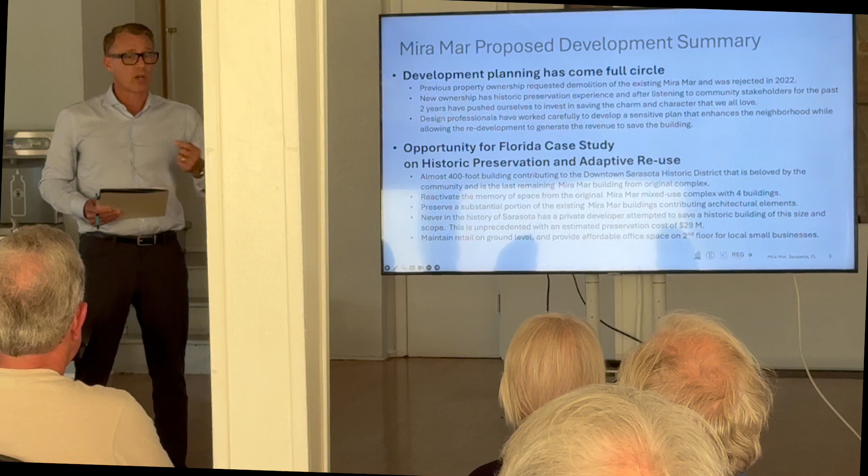We said to ourselves, is it possible to save a nearly 400-foot long wood frame structure that's 100 years old? Initially we thought not, and that's why we went forward with the demolition plan.

Could we afford to do so? In Connecticut, where I built homes and commercial properties before moving to Sarasota, I was involved in many single-family restoration projects. Any time we got involved with restoration compared to a new home, it would always cost us ten times as much—four times as long, ten times the money. That was my history coming down from Connecticut.

So we paused and took the time to really reflect and ask, once again, can we do better? Matt and I scoured the state and ran into Mr. Rick, and immediately we received an education.

So we rekindled that relationship, and basically Rick said to us, if I'm going to be involved in this project and put my pedigree and my name on it, it has to be done the right way. So I'm driving the bus, we're going to drive the decisions—and Matt and I listened.

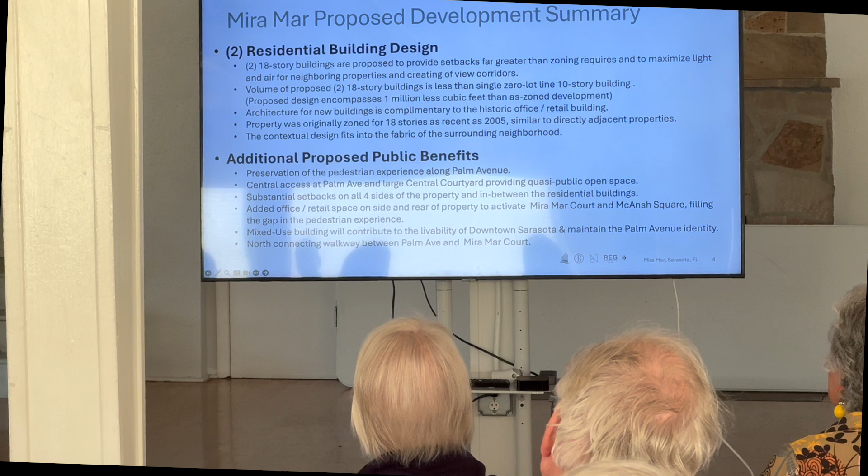Nowadays, the big buzzwords in mixed-use development are activated, connected, and vibrant. That's really what went into the vision behind this process — to create something for the community that's valuable. It'll be a nod back to history, but also vibrant and livable for the future. I'm going to turn it back over to Melissa.

These are just some of the preliminary matters we already discussed. Let's go to the next slide.

This is the exact request by the applicant. The first is a comprehensive plan amendment, changing the future land use classification from its current downtown core to downtown Bay. The second is to rezone the property, also from downtown core to downtown Bay, to allow for 70 residential units.

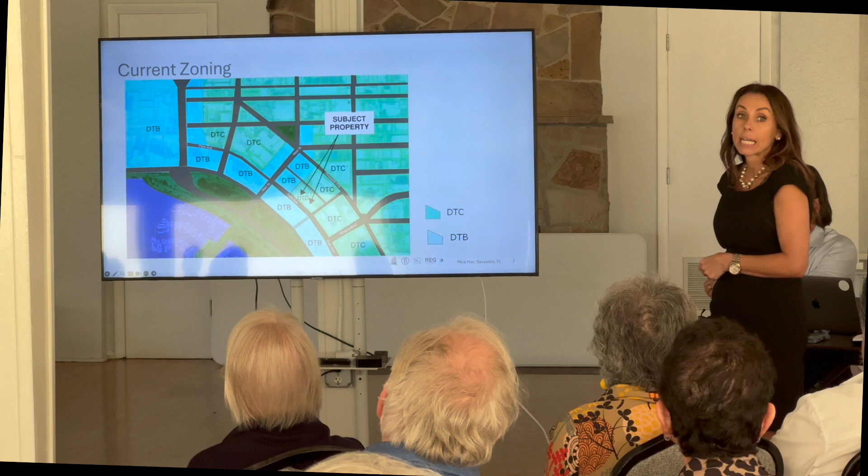But remember, it's just to develop these 70 residential units. I want to make it clear that this rezoning is not adding any density on this property — the property as currently zoned already allows for the 70 residential units. The purpose of the rezoning is for the 18 stories, as I'll show in this presentation, and as Igor and Rick will discuss in depth when they go through the project design.

This is the current zoning. You see the Mira Mar property here, zoned downtown core, changing to downtown Bay. As Candace pointed out, prior to 2005 this property was zoned CCBD, Commercial Central Business District, which allowed for the maximum height in the area. We are just going back to what it was pre-2005.

This gives you a glimpse of the permitted uses in downtown core compared to downtown Bay. They are identical except that five more noxious uses are not allowed in the downtown Bay district. So you will not have a detention facility, vehicle repair, or quick servicing repair nearby — things that could come up right next door right now.

Downtown Bayfront, my apologies — so we're rezoning from downtown core to downtown Bayfront. Sometimes I let my wording and slang get too far ahead of me.

These are the development standards. Again, identical — they allow for the same density, same lot size, same building coverage. The only thing changing is the height, to 18 stories. That may seem like a big deal right now, but I'm comfortable that once I turn this over to Rick to discuss the project design, it might alleviate some of those fears. So with that, I'll turn it over to Rick Gonzalez.

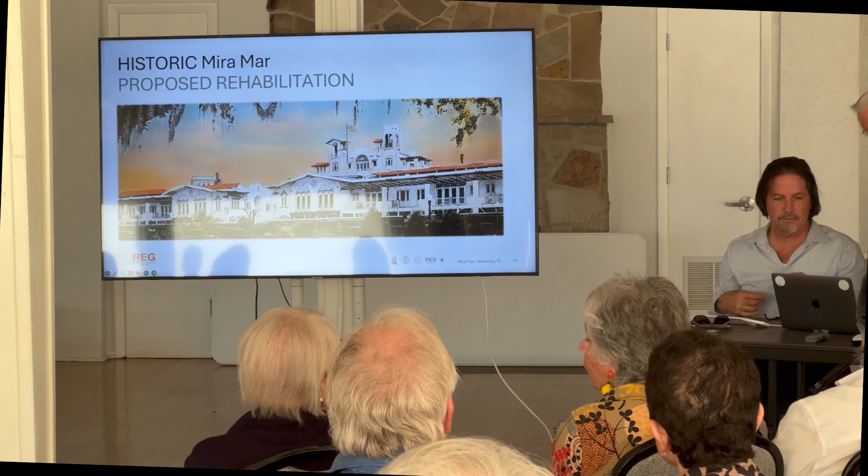Good evening, everyone. Can you hear me? Hopefully, yes. Okay, warm evening — I think they said fall is going to be here Sunday, right? So we hope so, right?

So I would like to talk today about the historic portion of the project. My friend Igor is going to be talking about the towers. The towers are what is going to help pay for the $29 million it's going to take to restore this project. If you can't get the towers built, there's no economic engine to save the structures.

The structures are in very, very bad shape. The building officials have already walked through portions of the building. Portions of the buildings are not accessible. We've had a lot of rain, we've had a lot of storms.

I'm on the East Coast. I keep praying every day. So far, knock on wood, right — no hurricanes in Florida this year, right? And that's through the end of the year, right?

But the Mira Mar is under threat — it really is under threat. It's a spectacular building, 400 linear feet of building. I remember when Matthew called me a couple of years ago and said, 'Hey, I got a historic project for you in Sarasota.' I said, oh, I like Sarasota — I remember when Andres Duany came over here and did some plans for the city. Love to see the project.

He sent me some beautiful renderings that Igor had done, but it was of a brand new building. There was no historic Mira Mar. He said something like, can you give it a little touch to make it look more like the Mira Mar? And I said, no, I can't.

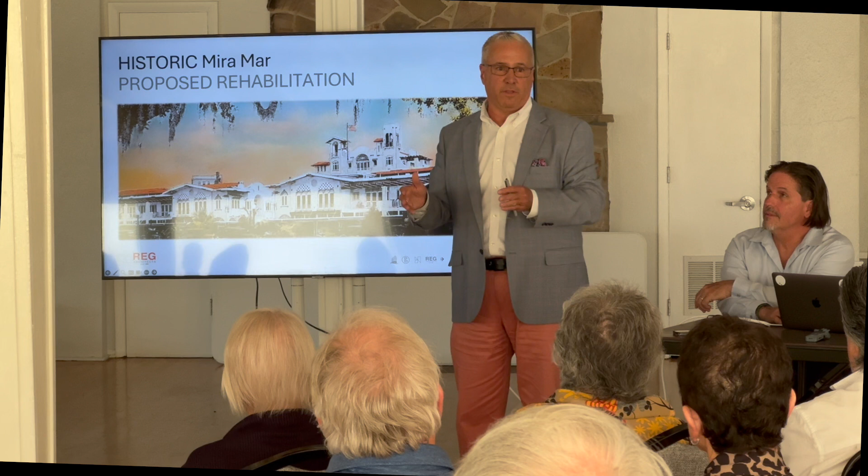I thought it was really important that we spend a little time with the community to show you these magnificent structures, 400 linear feet. I live and work on Clematis Street in West Palm Beach—our blocks are 600 feet long, and our buildings are anywhere from 50 to 150 feet. So 400 feet is a really long historic building.

Next slide, please. As you can see, it's already eclipsed 100 years in 2023. It was built very rapidly to support the hotel—I think you said it was 2 months of construction for the original? I thought the Breakers was quick when they took 11 months to rebuild it in Palm Beach, but 2 months to build the front buildings so that in 1923-24 they could build the hotel, the Grand Lady, behind the structure.

Originally apartments above and retail below, but in the last 40 years or so, since the 1980s, it's been office use with commercial on the first floor. This is probably the most affordable second floor office space in downtown Sarasota—everything has gotten so expensive with the amount of people coming to Florida, and our main streets are disappearing. So there it is in its grand heyday.

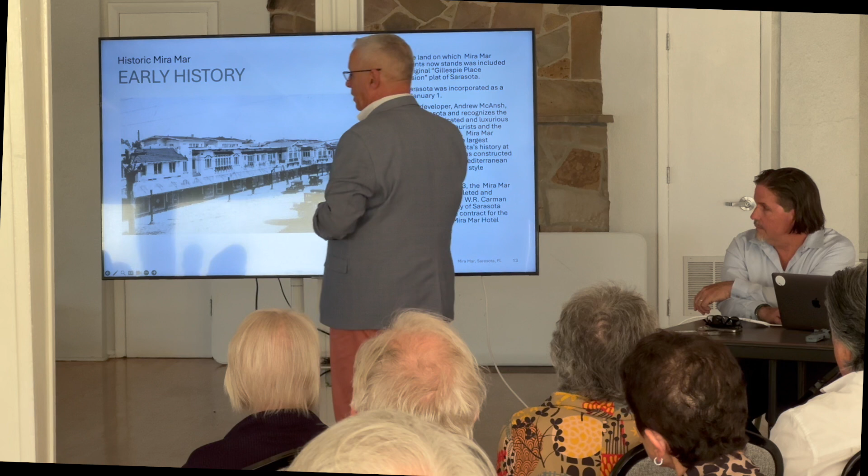If you look at the Sanborn maps, the historic maps, they show you development patterns over time. There wasn't anything across the street or behind—just the shops in front, the courtyard, additional side yards, the hotel, and a beautiful theater where the Aloft Hotel is today, which is gone now.

These are just some really beautiful pictures of what the building used to look like. Really, really gorgeous, very eclectic too. Some people would say it's Mediterranean revival. I say yes, but it's got some mission and even maybe some early Frank Lloyd Wright with the beams and the overhangs. There's phenomenal large overhangs on the building. I haven't seen that in any other Mediterranean building. Usually they go from 12 inches to maybe 30 inches, but these are almost 4 or 5 feet. A lot of detailing, a lot of interest.

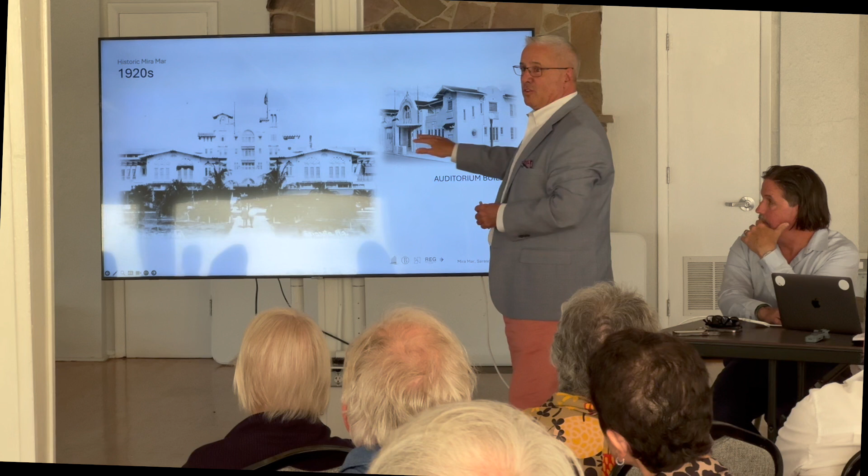The theater was spectacular. Too bad we couldn't convince the A-Loft to have kept the theater, right Tony, on the side of it. But there it is.

The courtyard space is just phenomenal. We're going to embrace the courtyard, reconstruct it, and it's going to be one of the 2 entries into the beautiful apartments designed by Igor. We're going to have another via too, adjacent to the demarque. There's a 6-foot alley, a via, a pedestrian via. So there'll be 2 ways to cut across the street, from the east side to the west side. And there's also a big change in topography there, by the way. We're going to have, I think it's about 8 feet, right Igor?

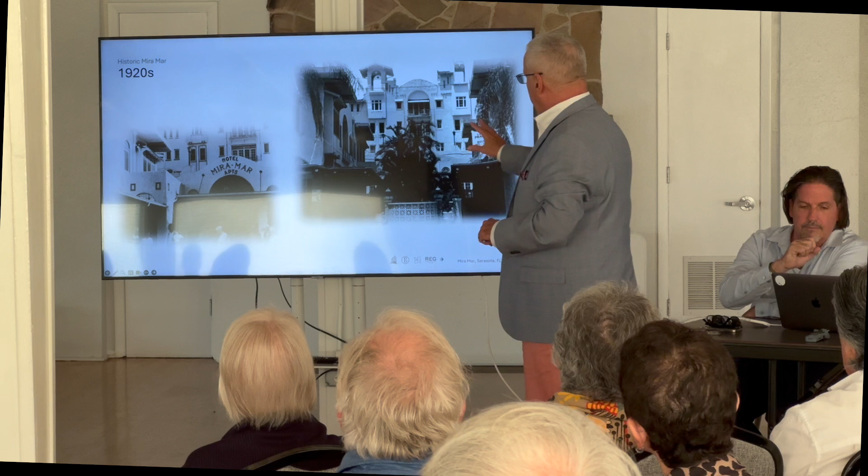From the back street down to Palm Avenue in the front. And so the towers, go back for a second, there you go. So the towers will be like that, coming in with the courtyard space up in the middle. Again, the idea of bringing in the courtyards, you'll see Igor's presentation showing those areas, some of that feeling, that idea of history coming in place, all the way through the 70s.

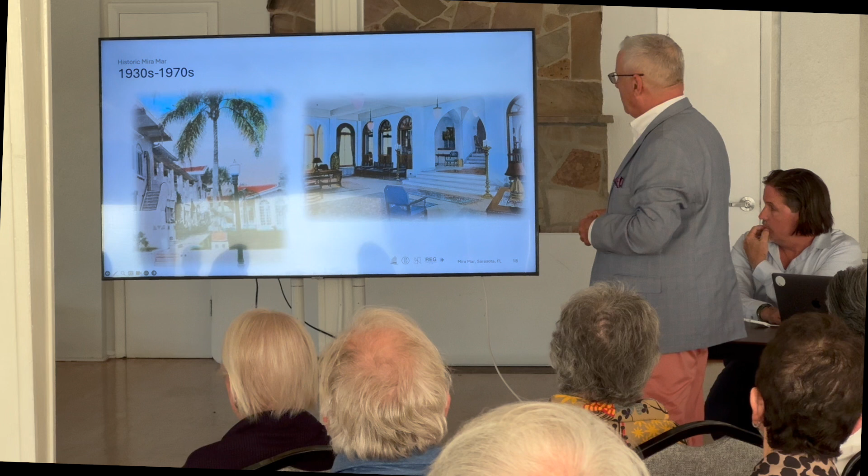That was really the period of significance for this structure, 4 decades, right? 1930s to 1970s. And then, a couple of pictures of the interiors. Stepping down, because again, the topography going up the 8 feet, we'll have similar but different looking steps from the courtyard to the motor court. The elements are there, a lot of the elements are there. We've digitized the building. We have many records now available and photography of the existing space. Notice there's not a covered arcade, but there's a canopy.

We're going to bring that back to the original design. And these are just some beautiful, this is probably the best photo, which shows everything. And then also connection to the park and to the waterfront to the west. Another rendering photo from the 30s. And this picture from the 60s, development was already starting to happen along the waterfront in front of the building. The auditorium was still there.

But downtown, the historic Main Street, you have a beautiful historic district. You really do, you're really fortunate. When I first came to visit my friend a couple of months ago, I enjoyed it very much with my wife. We walked around, went to your Main Street, enjoyed dinner. We went to the amazing gardens that you have, walking distance right down the street. That's Selby, right? The Selby, yeah. Selby, just and the waterfront, of course, right? Especially in March, it's really nice walking around.

Next slide. Now, what happened in Florida, right? A lot of, and I'll show you a couple of case studies, a lot of demolition in the 60s, 70s, and even in the 80s. Historic preservation was not valued that much. It was, oh, let's tear it away, let's change it, let's cut an arm off, or cut this off, or do this. The building has had significant changes.

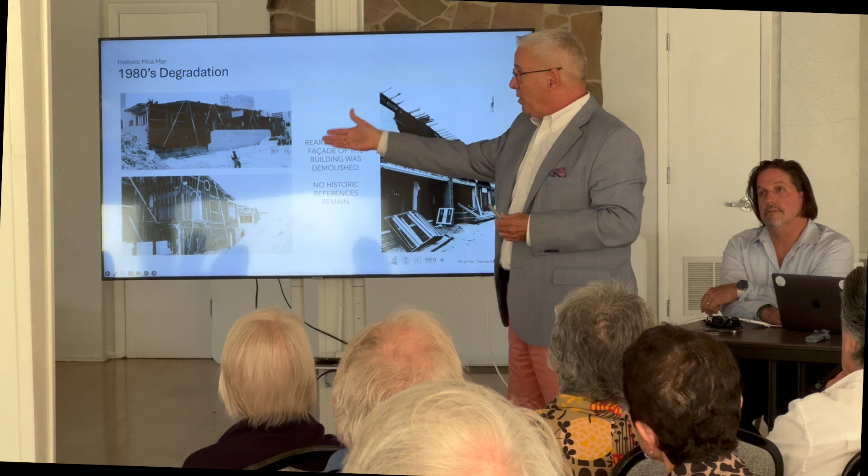And we're like surgeons, we're going to go in there. First, we're detectives. We come in, we measure everything, we look at the photographs, and then we're going to work like surgeons. We're going to remove portions that are not appropriate, that are not original, and then we're going to reconstruct it to match the historic 1923 look. That's our goal. That's what I've been promised by the developers. That's what the $29 million budget gives us, and that's what we're going to do as we move forward with the project.

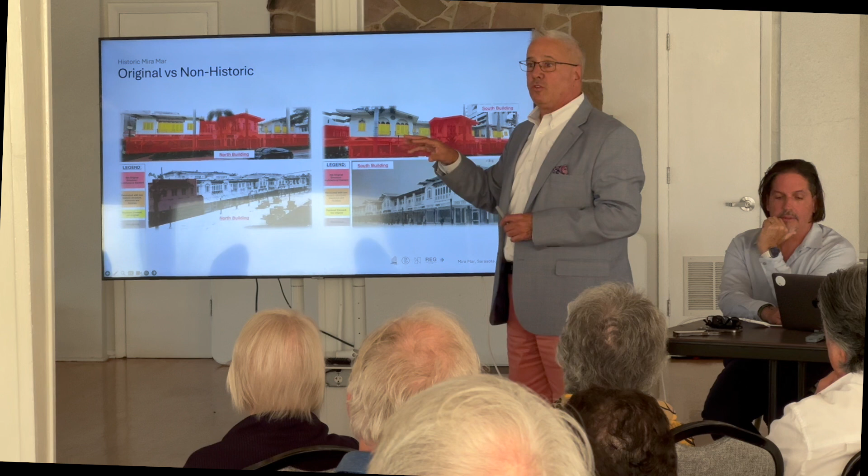This is an interesting diagram that shows you in red all of the changes that have been done since the 1980s. The orange portions on other slides show you what was renovated, and the yellow are new items. Windows, they're new windows, they might look a little historic, but they're not really historic, that have been replaced over time in the 1980s. Both the north building and the south building.

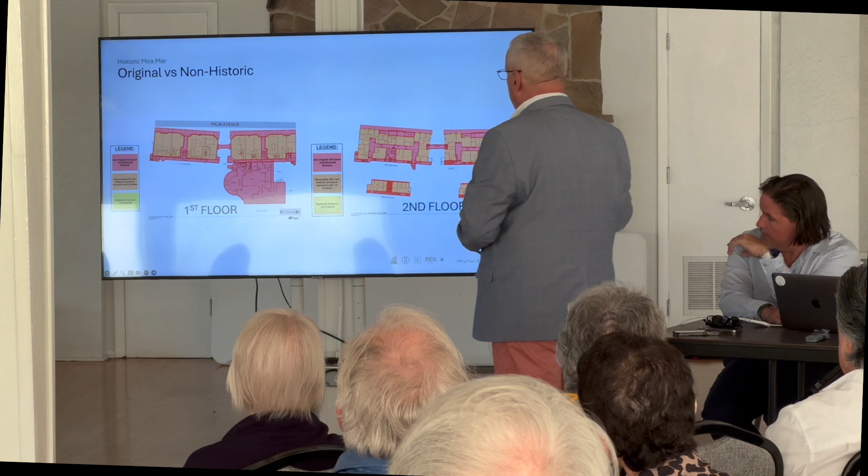Same thing with the floor plans. There's a bizarre-shaped garage on the back side of the building, right on the back street. All of these arcades, all of these breezeways. There's this glass tube that is probably 125 degrees every day, from one building to the other.

Next slide. Now this is called the laser scan. 40 years ago, we used to measure panels. We used to do drawings, measuring every single drawing. It took a lot of time.

We have computers now that scan buildings. Civil engineers usually do it, universities do it too, with special equipment, it's a point system. For example, it measures that column, the width of the beams, every little detail. And it drops into a form that we then convert into a three-dimensional Revit computer file for our drawings.

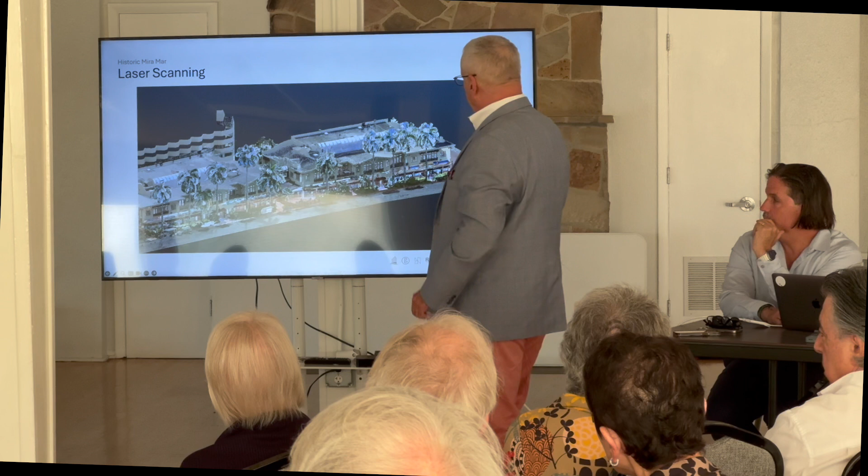Very, very accurate. Every single condition of the building is shown on the Revit file, and with the engineers, as we start developing the final plans, it'll allow us to be very, very accurate with the renovation and rehabilitation of the project. There's another view of it. Come back to it for a second.

One of the arguments at the beginning was turning the corner, right? The demarque, I don't know what they did there, but it's not historic preservation. They kept a little wall and added something very large. We had back and forth, and I said it's not just a facade, you need to turn the corners. If you don't turn the corners—and Mayor Riley would say that—the corners are integral to a historic block. You must keep the corners, okay?

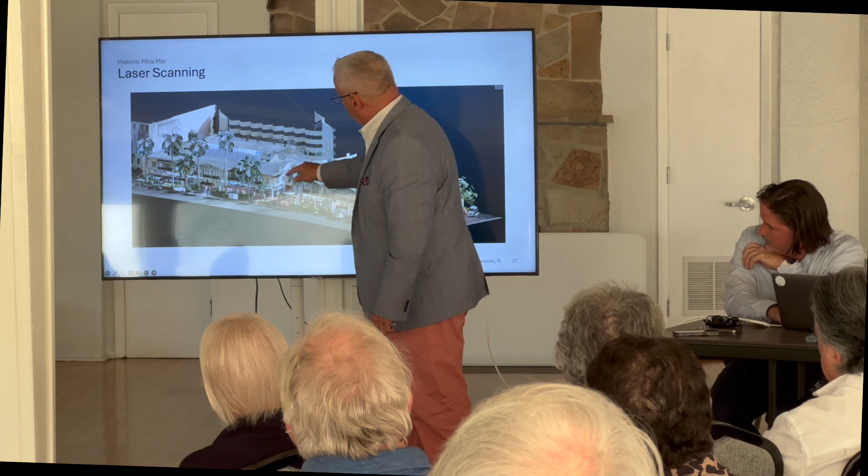So we are keeping the corners, all 4 corners are being kept. We're turning the corner to the main parapet here, in the middle courtyard. There's the other one, you see the other one, the parapet there in the other courtyard—that's the second and the third. And all the way even back here where the little 6-foot alley is, all 4 corners are going to be reestablished and restored.

Very important preservation. It's not historically designated because it's been changed so much in the 80s. We've been talking about getting historic tax credits, trying to get tax credits, Tony, right? We talked about that, we're definitely going to look into that.

I'd love nothing more to get a designation, and we shouldn't be afraid of it, because frankly, when you build 2 beautiful apartments behind the building, that apartment building is going to be there for 100 years or more. So the restored Mira Mar, for the first time in 40 years, will be there for the next 100 years. That's how strong and steady we're going to make the building after we take out all the non-contributing additions.

All right, structural analysis, we're done. Everybody that does a project in preservation and non-preservation, there are 2 types of engineers. There's engineers you can pay and they'll say, knock it down because it's not in good shape. Or you go and find a historic preservation structural engineer and they'll work with you. And that's what we found.

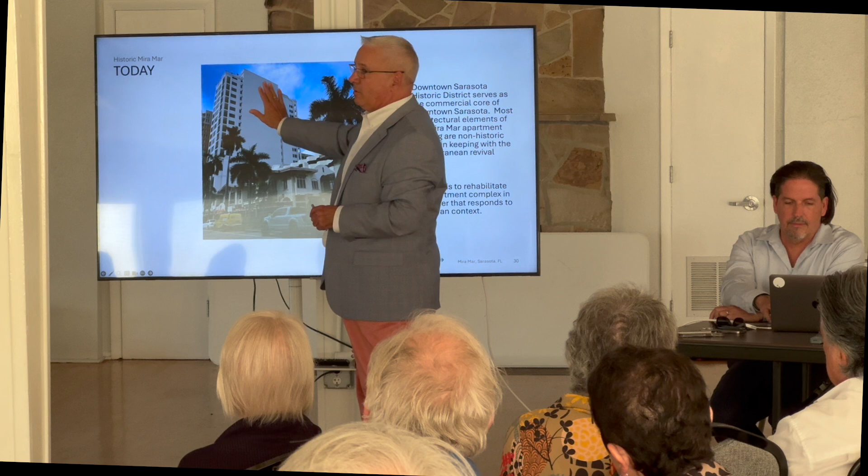This is another picture just showing it today, its current condition, and I've told you everything that we want to do. Go back to that picture again. And a nice thing about the new tower, it's going to cover that. I don't know about you, but when I first came, I stayed at the Aloft, I walked the corner, I saw the beautiful historic buildings, and then I saw that—so hopefully something nicer will cover it.

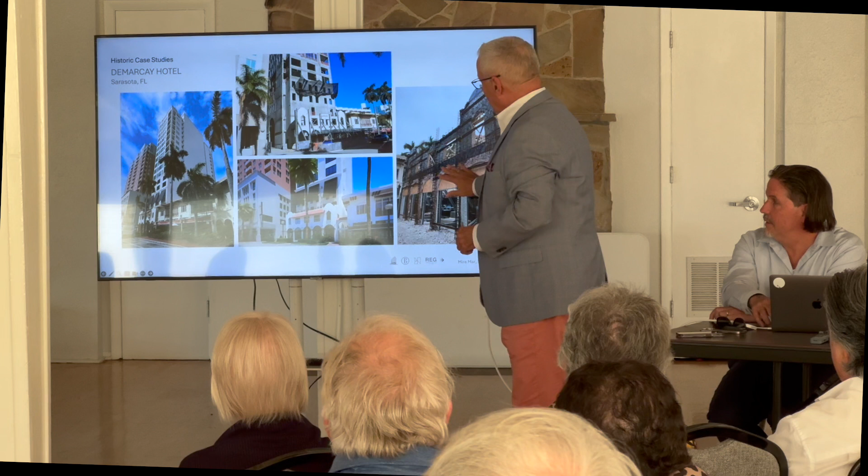Okay, and this is unfortunate—I had a couple of case studies, this is the only one that's so-so, right? The Demarcay kept a wall, and then they added the building, and then they did a cartoon on the back elevation too, which to me, I don't know how that got approved, but it is what it is, right? There's been other buildings here in downtown, like in all downtowns, a lot of historic work that's been remodeled or demolished and partially rebuilt.

And then I have a couple of examples of other case studies. Of course, our office is in Coral Gables. He's not a Miami architect, he's a Coral Gables architect. There's a big difference—some of you might know what I'm talking about.

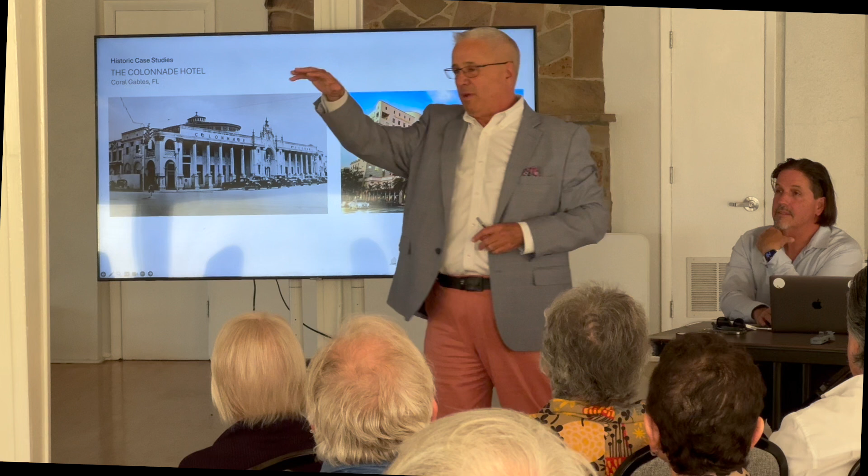When I go visit Igor in his office, we have lunch in this amazing historic bank space, and they added an amazing hotel seamlessly. This is exactly the case study we want to present for our Mira Mar. We want it to be seamless—walk through that courtyard, go up the 8 feet to the apartment building, and cut through the building if you want to reach the school across the street or other parts of downtown, or just come and use the courtyard space, a little surprise space in the middle of the historic district.

This is one of our projects. We currently do the work at Mar-a-Lago. We've been doing it for 26 years. That's one of our projects.

This other project is the Lake Worth Beach Casino. I show it because it's an example of a crazy project. What do I mean by that? Drawings were done, contractors were picked, ready to go to work, started the demolition, selected demolition, and the thing started to crumble all the way down to the ground. We were like, what the heck happened here?

We sent out testing for the concrete, and they used beach sand in the mix. That's happened in many buildings on the ocean—salt doesn't do well with concrete and steel. I wanted to show you this because I wanted to show that a reconstruction, if you work really carefully and hard with a good contractor and a good client, can come very close to the original historic structure. Not proposing that here, but it's there in case we need to refer to it.

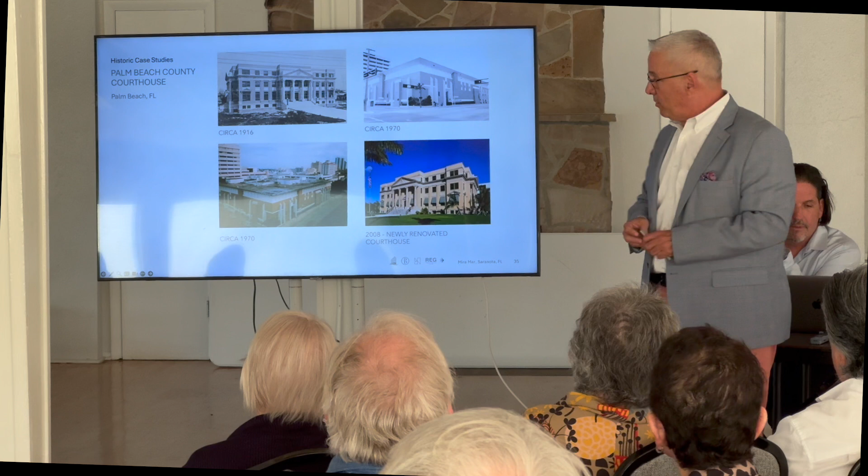This is probably the most important project I've done in my 30-some years: the courthouse in West Palm Beach. Here's the original from 1916—well, this is what they did to it in the 1970s. Whenever I have young people or seniors on our walking tours, I tell them to close their eyes and not look at this, because it's scary to me, the architecture of the 70s. I'm missing a picture—I should have brought you a picture of how horrible it looked in 2005 when we unwrapped it. It's a building within a building.

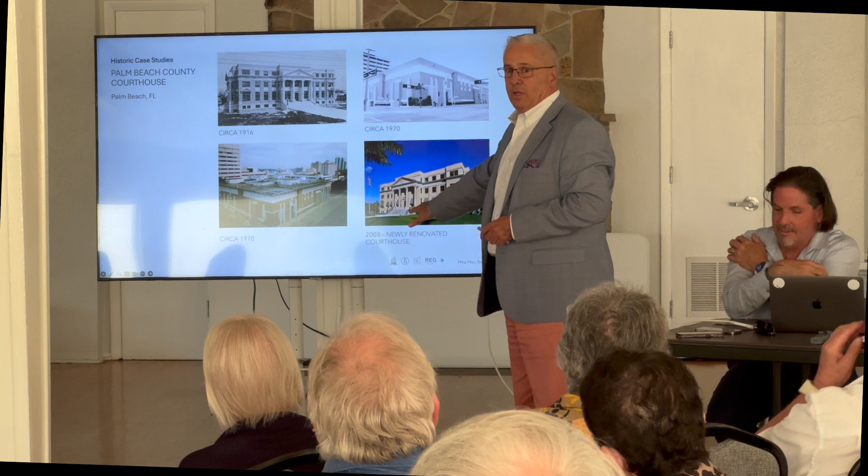We unwrapped it, and I need to add that from the next presentation to show you how, because it's going to be scary—you're going to have a lot of work to do before it looks beautiful and spectacular. It's the historic museum for all of Palm Beach County in downtown West Palm.

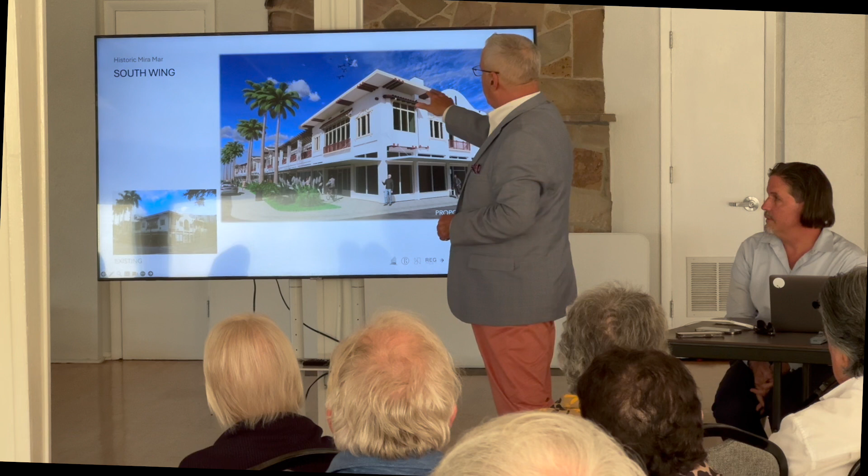Now the pictures, again focusing just on the historic Mira Mar portions. This is starting on the south side when you're coming from Aloft, walking north—the canopies restored, the balconies, the parapets, the little detailing, the Frank Lloyd Wright trellis. Believe it or not, we're missing a very large trellis area, very open—it was very light and open. For some reason, they added another curvature, mission-style feature.

And then the file—in fact, we started drawings. We went a little bit farther; sometimes you have to go a little bit farther to come back. I explained that to Patrick, at great expense, right, Patrick? We had to go a little bit farther to make sure we could have this conversation today, that this is doable. We have a great structural engineer, a phenomenal client, and a great partner in Igor, who's here now presenting the rest of the project.

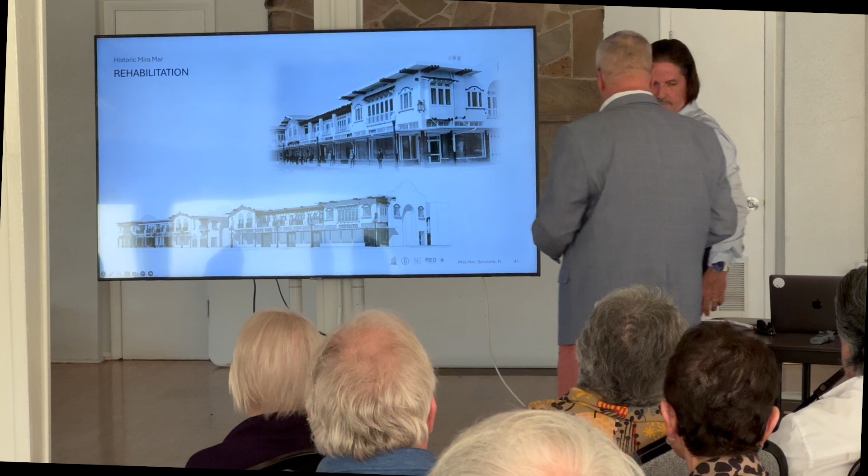We do these projects a lot. On the beach, there's a lot of Art Deco buildings in Miami Beach that are trying to be preserved, and somebody wants to put in a 200-room hotel that doesn't fit. The Loews, which Candace mentioned, was one of those. We worked really closely—the historic building is a gem, actually freestanding, and we had enough property to leave it freestanding. So we're used to this, and we work with a lot of historic architects.

Rick is really one of the leading historic architects in Miami, in Florida altogether. So we were made responsible to build the economic engine that's going to allow this to happen. It's a big responsibility, and we wanted to make sure we didn't lose our minds—the economic engine was actually very sympathetic to what was going on. We didn't want Rick to put all that work in and then have us come in and flop a building on top.

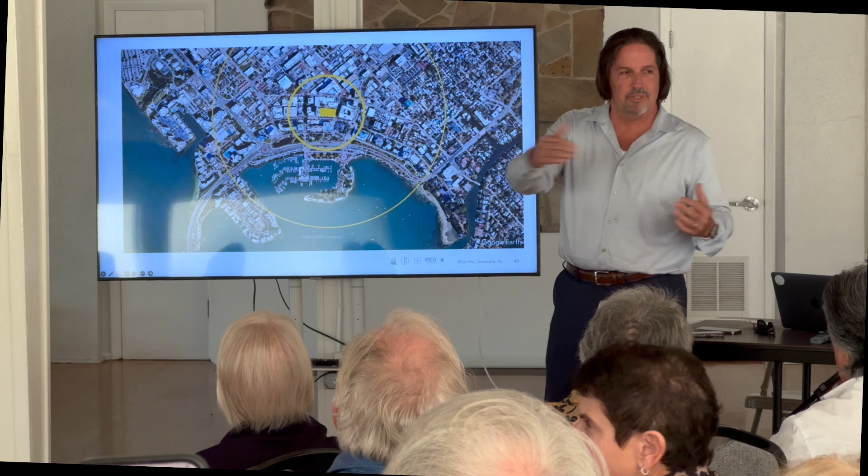So we took a step back and said, you know, this site is in the center of things. You can see the circles, you can see the bay, you can see the way the street arcs. It almost feels like the whole streetscape was designed around this particular site.

And we came back to what it was—not just the historic building that Rick's been talking about, but the whole campus. Take a look at the whole campus. Let's see what else the Mira Mar Hotel was contributing to the city of Sarasota, beyond that retail apartment building.

I'm going to call this portion of the presentation Memory of Place. Make sure that what we're adding to the building actually contributes, maybe pulls back some of the old memories that someone who's 100 years old might have had walking through the site a few years back. So we took these images, and we'll talk about each one specifically—we're really looking at and taking information from these images.

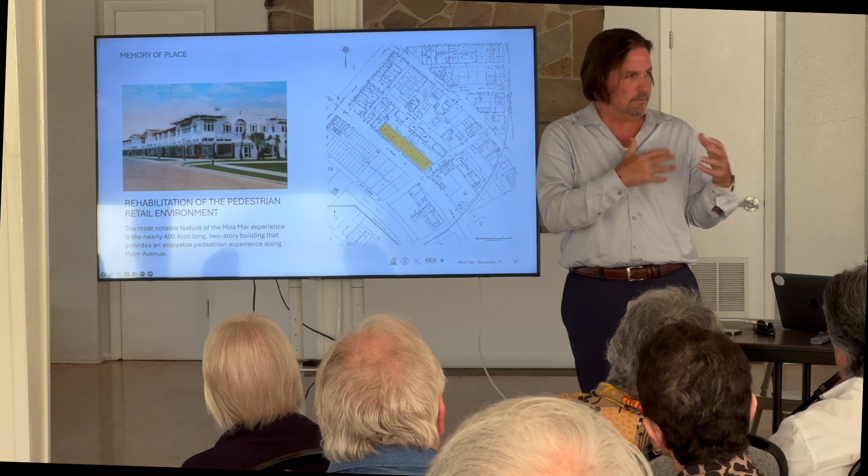First of all, obviously, rehabilitate the building. But beyond rehabilitating the building, it's really that pedestrian experience—being able to walk for 400 feet, which is a long way, with retail on one side, a nice wide sidewalk, covered shading above you, a two-story building, so it's an incredibly nice pedestrian experience. We restored the building, but the whole pedestrian retail experience is still there, very strong, and if anything much stronger because of all the supporting spaces.

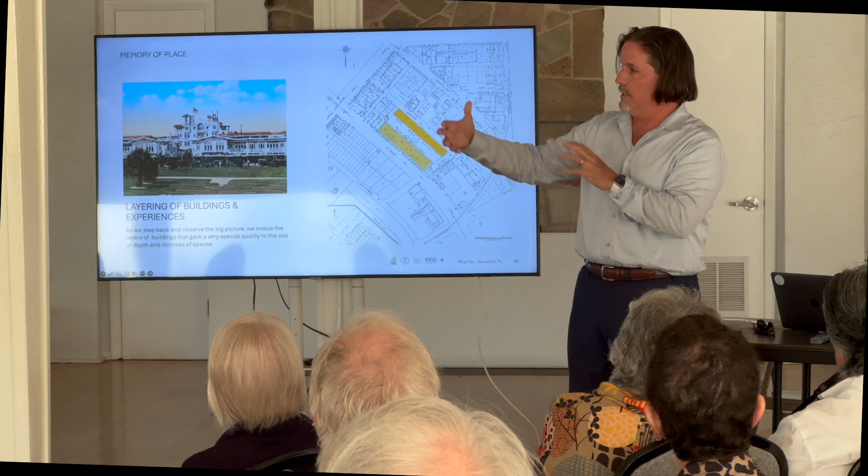The campus was made of layers—an apartment building in the front, and in the back, as we've mentioned, there was a hotel. These layers really enrich your experience walking through a city. When you walk past the building, you think, wait a minute, I can make my way around the corner, walk in between them, get to something else. So this building that you just look at, you can actually go into and almost feel its inner workings, how it moves and how it works.

Very important to that were the landscaped courtyards right between the residential apartment building and the hotel. They're very important because they allow each component to breathe, so they're not mashed one on top of the other. The apartments can do their thing, the hotel building can do its thing, and you can appreciate it all the way around, really getting to know each component as it is, or as it wants to be.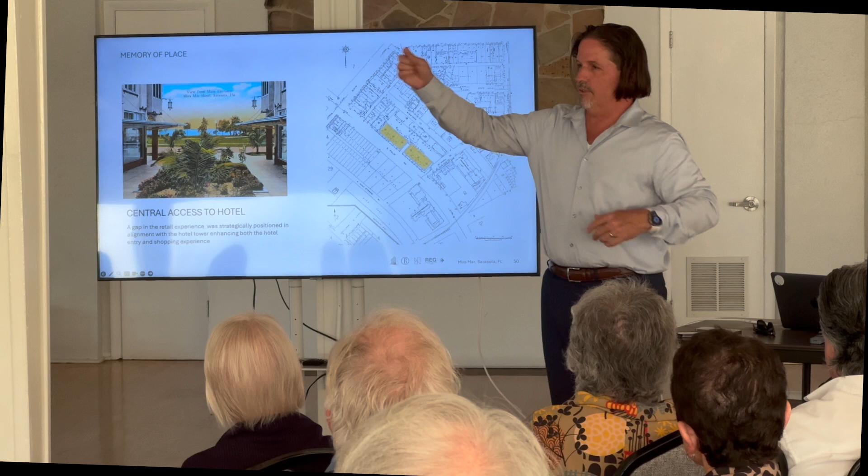And then the central access—in this pedestrian experience I've been describing, it's nice to be able to get to the hotel right through that experience. You don't have to walk around anything, don't have to go to the street, make a left, make a right, to get to the entrance. You're literally at the middle of this experience. It's historic, it's been there forever, and it's just very pleasing to see.

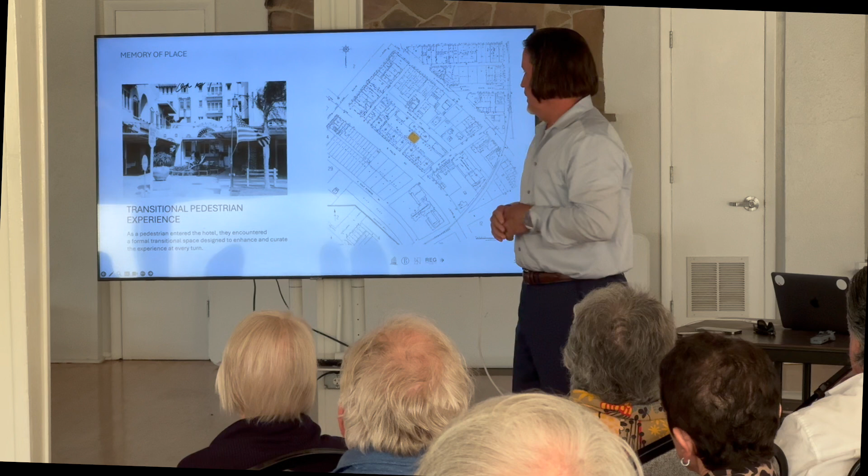And then that little central piece, which Rick designed really nicely, was the lobby with the steps and the arcades. It's a really nice moment where you're transitioning between the retail, the sidewalk, and the hotel—turning up the volume on the fact that you're doing something really special. So we took a cue from that.

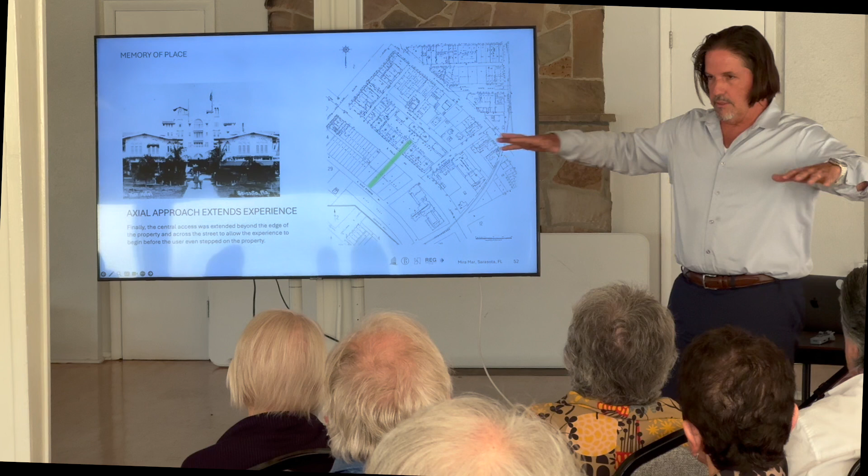Finally, as we've pointed out, when this was built there was nothing in front of us, so the architects had the opportunity to really expand the experience. You can be a block away and see right down the sidewalk, across the street, see the entrance to the hotel, see the retail. It pulls the experience of the building and expands it, letting it leak beyond our site and beyond the block.

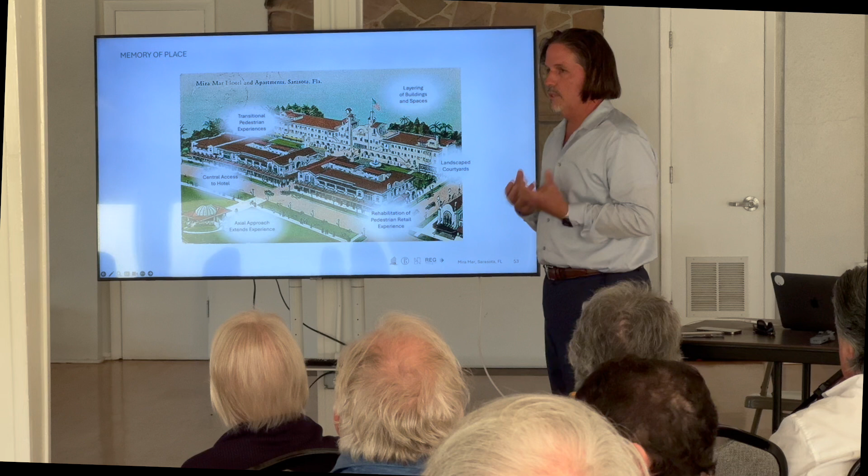This image, which Rick showed you, shows all the buildings. These six points are the things we thought, if our economic engine can re-establish them, we'd go beyond just being an economic engine and helping save the Mira Mar building. We'd actually be contributing to the experience of what the Mira Mar used to be.

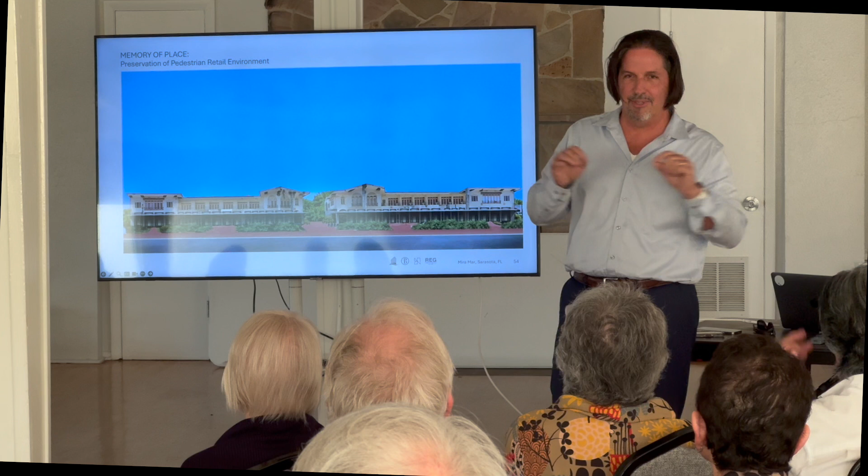Really quickly, I'm going to take you through a few slides. These are from Google Earth, so don't pull out your measuring tape, but there are some modifications. Here you can see how Rick would leave the building with that centerpiece out. There'll be a trellis over there, but a much cleaner building. And then there's always parking.

Parking is always a sore topic, but we thought we could take advantage of it because it'll be two or three stories above this building. If we can make the walls of it a green wall, an actual growing wall—we're still working with consultants, and we're hoping to get the Selby Botanical Gardens involved—we're really hoping to make this a lush, beautiful space that contributes to the beauty of it.

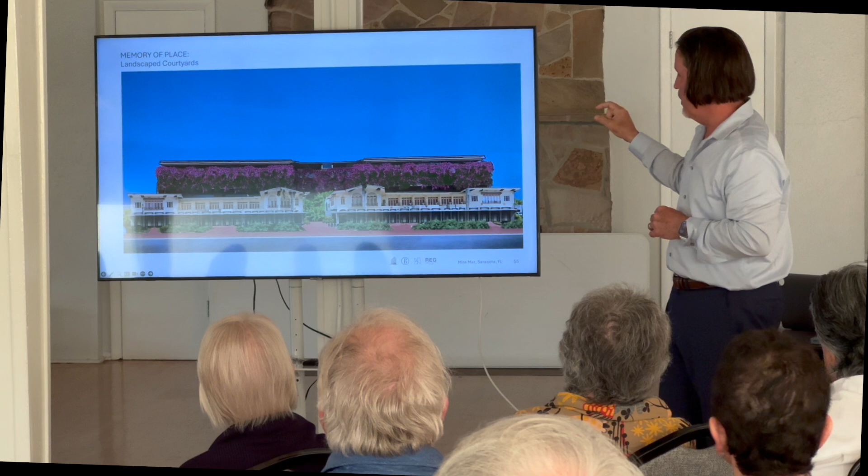More importantly, you can see the roof line of the historic building. A lot of times when you get buildings behind buildings behind buildings, you can't see the roof line, so you don't know where the historic building stops and the new building starts. We thought we'd give the Mira Mar Apartments a little cushion, a little pillow which is green, to allow it to be itself—going back to that landscape courtyard idea of giving the building space to be.

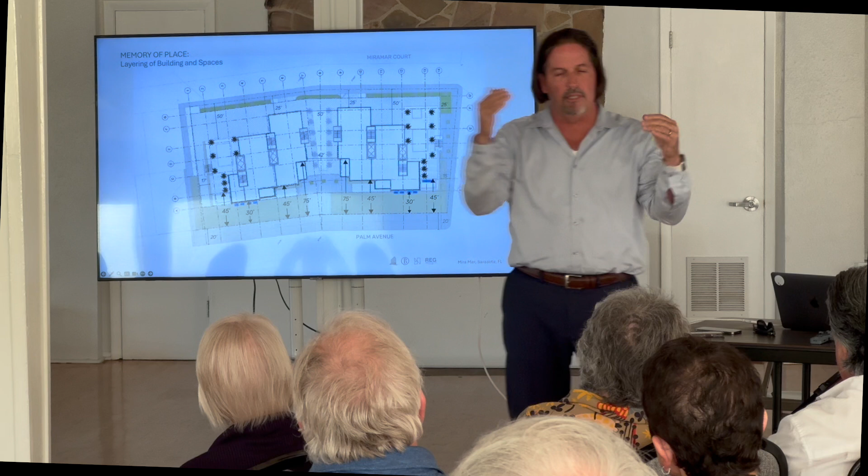So the layering of the buildings, beyond just putting one behind another, you can see all these different setbacks. Our towers are not going to be flat. Each tower is actually composed of three little components, and you can see the three setbacks: 30, 45, and 75. In between, there's 42 feet and 50 feet of space.

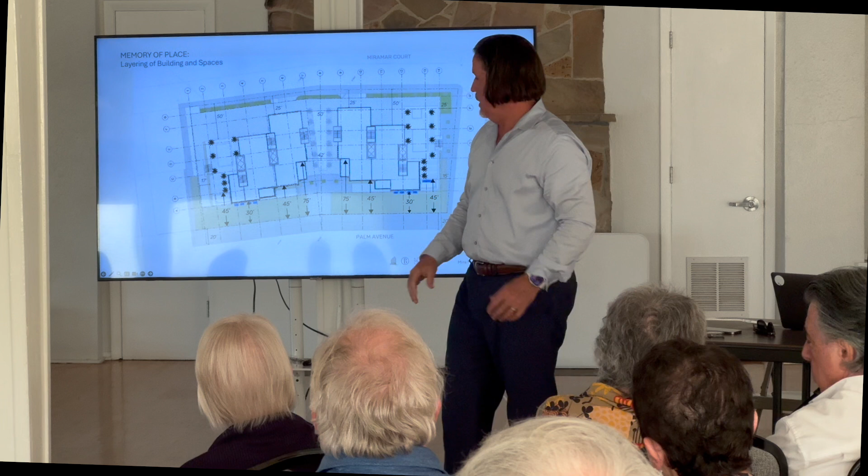We're trying to make sure that the building, which is going to be 18 stories at some points, doesn't read like an 18-story wall. It's actually broken down—you're going to see shadows, light hitting one side, shadows hitting the other. So there's this really nice flavor.

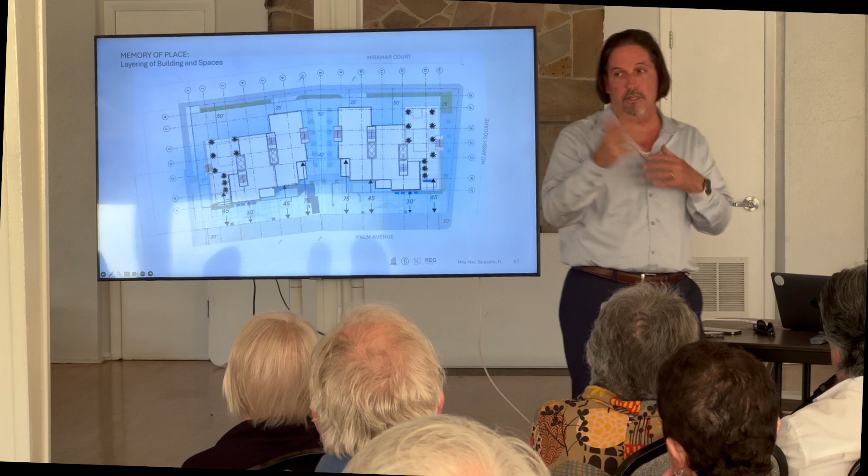This is a neat slide because the light blue is basically air going around the building. It's very effective because you see the whole block and think the building is the whole block, but really, this is the building, and all the blue stuff is air and light going around it. So even though they're tall, they're trying to get out of the way, put their shoulders in, their elbows in, and not take up more space.

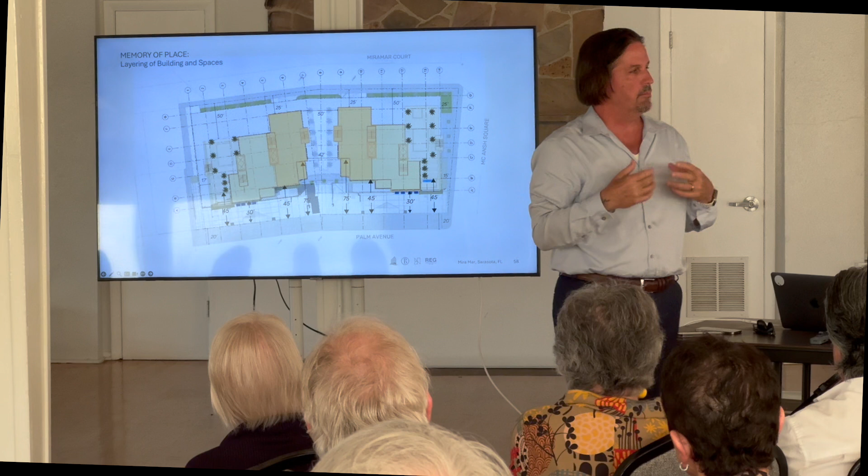This is just an image of everything put together—the buildings, the gardens, and the recreation. You can see there's no building here, there's space here between here and the streets, and there's 42 feet there.

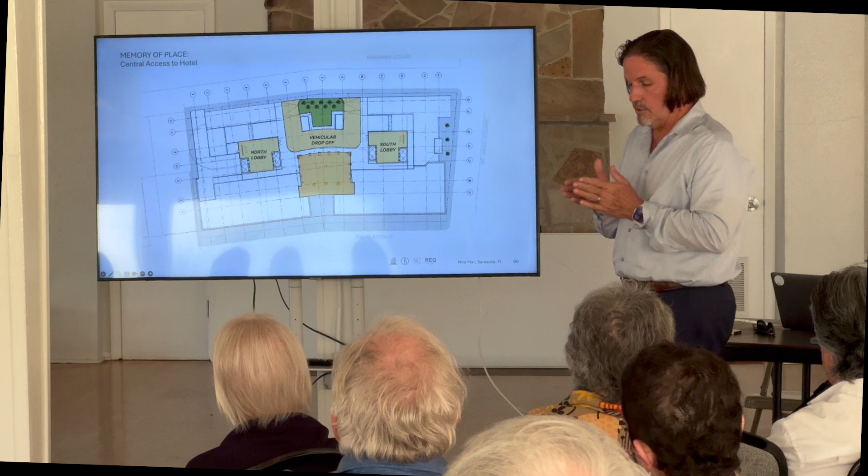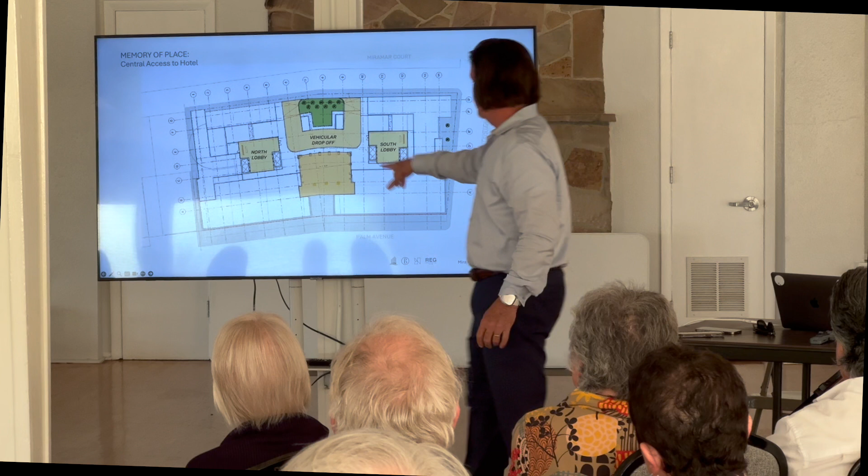The central access—we wanted to make sure that space wasn't just a stage set, not just something pretty you take a picture of and move away from. It's actually the access to the apartments, going to the lobbies. From here you'll get to the lobbies coming off the pond, and from here you can get from the big drop-off down to the retail and restaurants. So the central axis isn't just nice to photograph—it's actually going to be used, part of the daily routine.

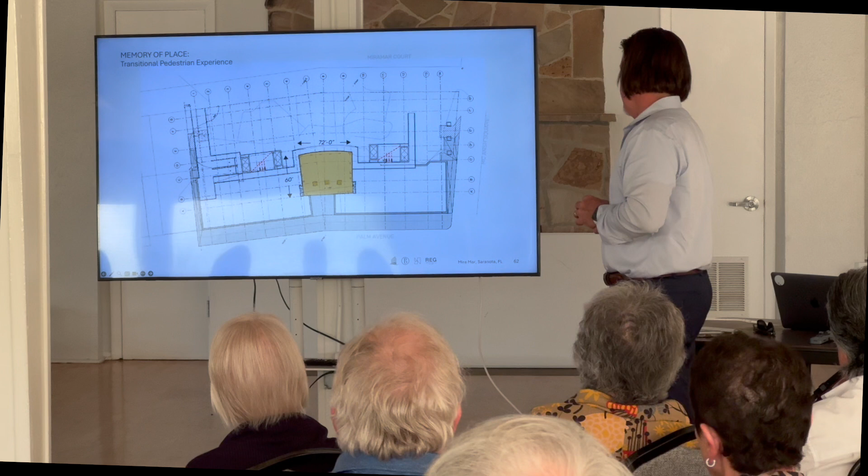This is basically the same image. And it's big, 60 by 72 feet. 60 feet is a typical street width, right? That's a typical right-of-way for a street. It's not a small thing. It's actually a very big place.

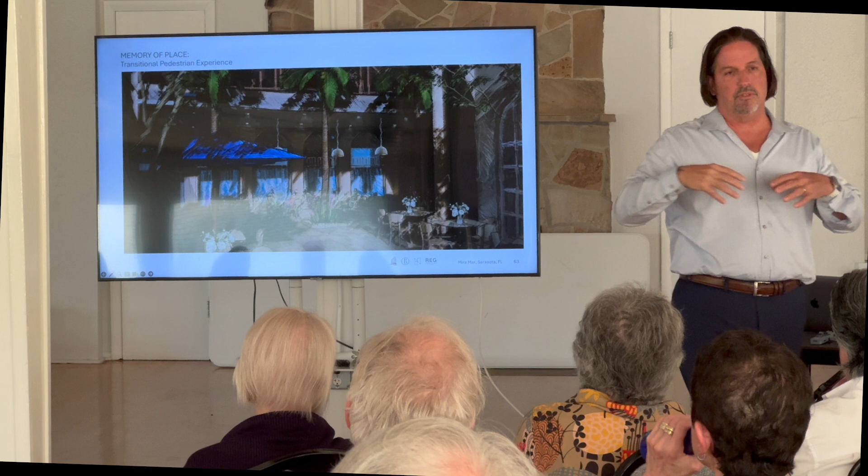And here it is. So you can imagine you're coming off the sidewalk, you make a turn, and then back to that transition space that we showed you a picture of. You have this 60 feet by 72 feet wide space, and this light blue you're looking at is actually the sky on the other side of the building. So we're making sure it's fluent, that you can get through the building, and not just get through it to a little corridor, but actually have plazas, transition space.

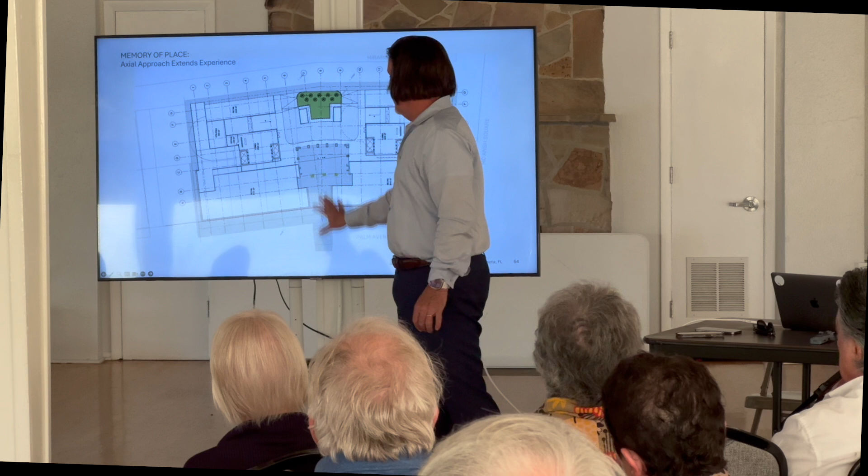And then finally, the axial approach, right? In the back, we're gonna have retail on Mira Mar Court, a little retail space, and retail all along here. At this area, it's gonna be a garden which sort of takes the way through the drop off. And what we're attempting to do is to take whatever treatment we have in the plaza, in front of our building, on the sidewalk, and cross the street.

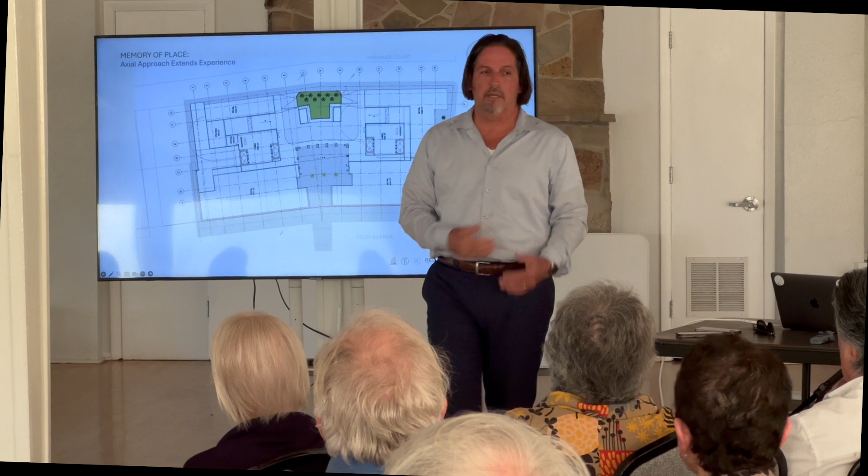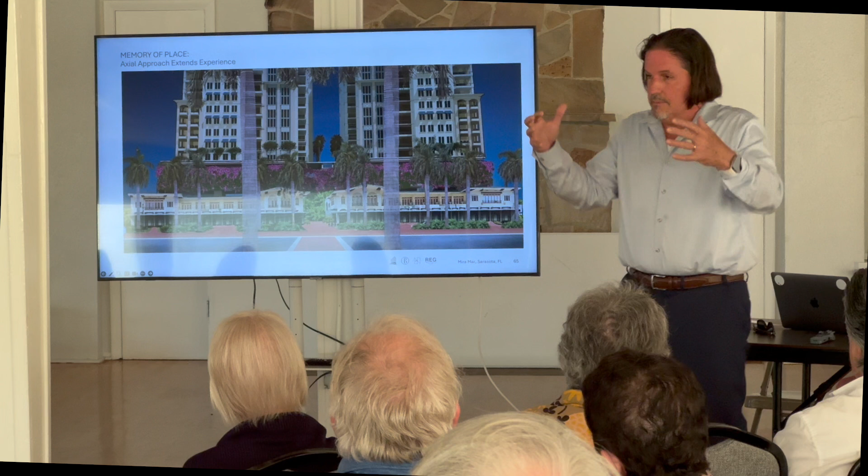So now we're hoping to cross the street and even potentially pave the sidewalk across the street. So now you really start to pull the neighborhood in. And here it is, of course, these are just palm trees and pavers, but you can see if we can get the pavers that go into the plaza, come across the street, use the same landscaping rhythm and treatment on both sides of the street, we're really starting to incorporate the neighborhood into our idea.

This is just a clarification of what's getting demolished, what's staying, what's getting built, all that kind of stuff. So the green, right now what exists is this, right? There's a big parking garage and then garage. Of this, the green is what we're completely restoring, bringing back to this historically significant building. And then the back, the red part, is where you saw in the 80s pictures when they tore it down.

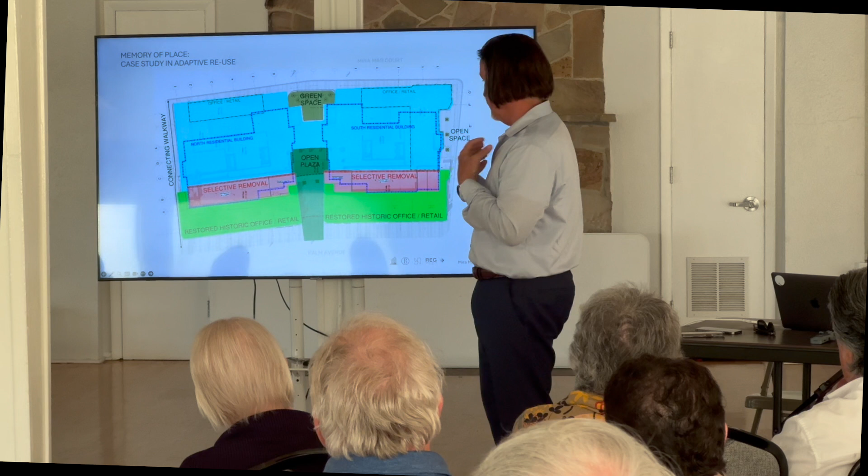We're gonna be selectively removing components from it. And just so you have a relationship with it, this blue line is the outline of the towers that I just showed you. So there's a reason why we're making that selective removal, but we're being very considerate in making sure every facade that's significant is staying. And then internally, we're being very selective, making sure you can see the percentage of green.

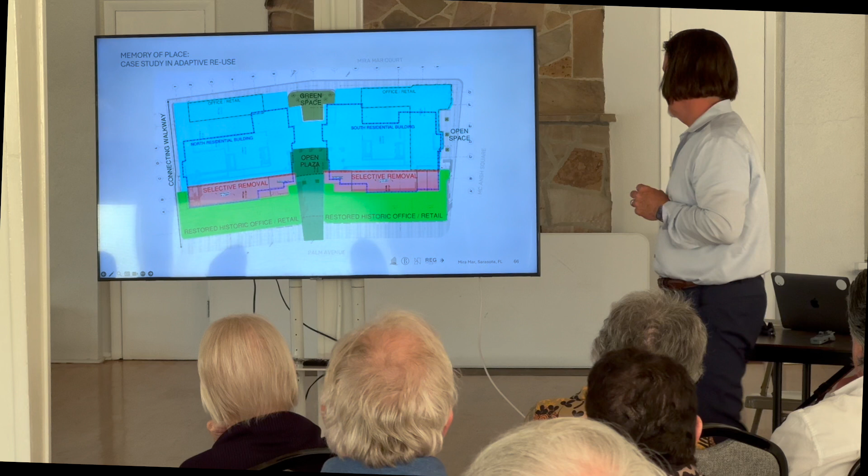So massing. We're gonna go through these quick, but I want you to really pay attention.

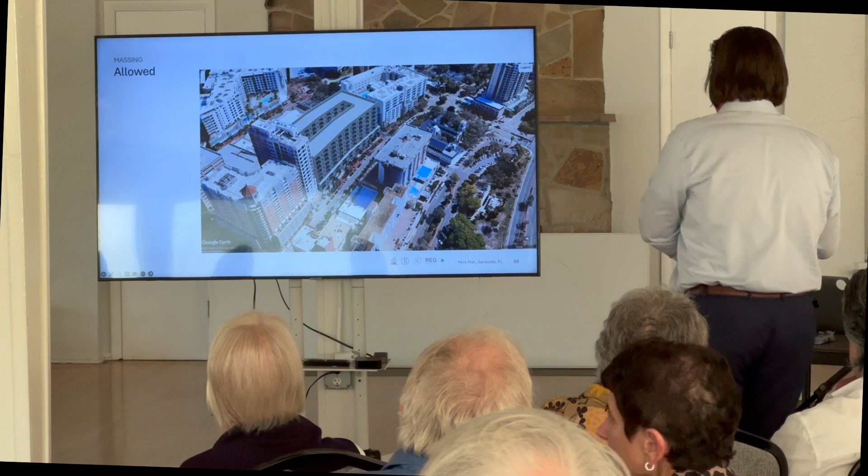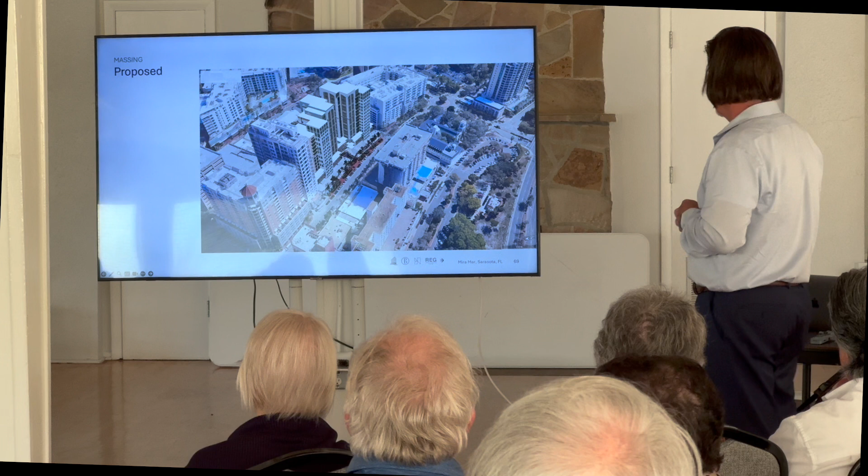And this is what we're proposing. So you can see we're just letting the historic piece breathe completely. Our building is set back, and our building is set back even further depending on where you are in the building. You can see that you can already see more air. I mean, if you just flip back and forth, you can already feel there's more air flowing around this building.

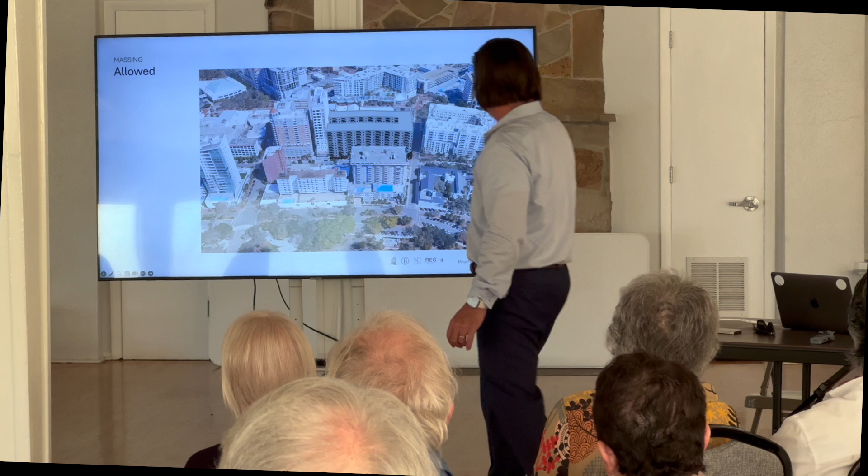And from the front, so you can see the urban wall. You can see how this has become one giant urban wall, but our building starts to break. It gives us air. You know, you can still see the pool deck of our neighbor to the west, east. Sorry, I'm from Colgate, right?

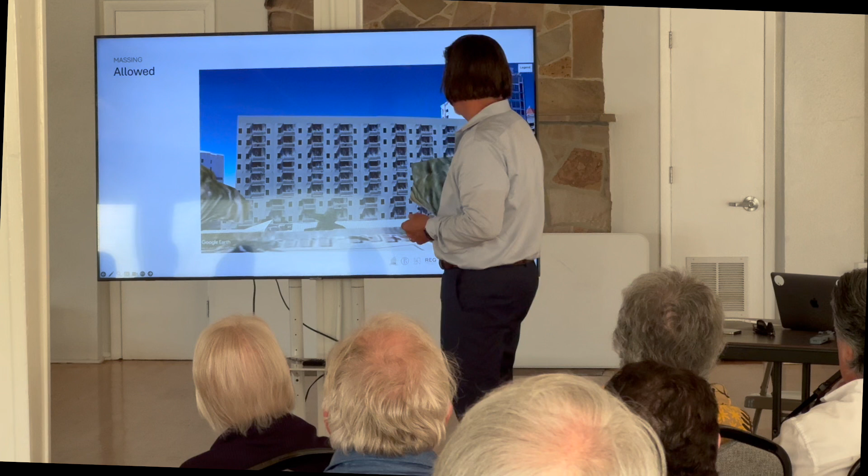And then this is from the back. This is actually a pool deck of our east neighbor. You can see the lounge. Check it. Next slide. Now these are all Google Earth, so don't judge the quality of the rendering. But this is how much air you'll get in between there. Go back a second.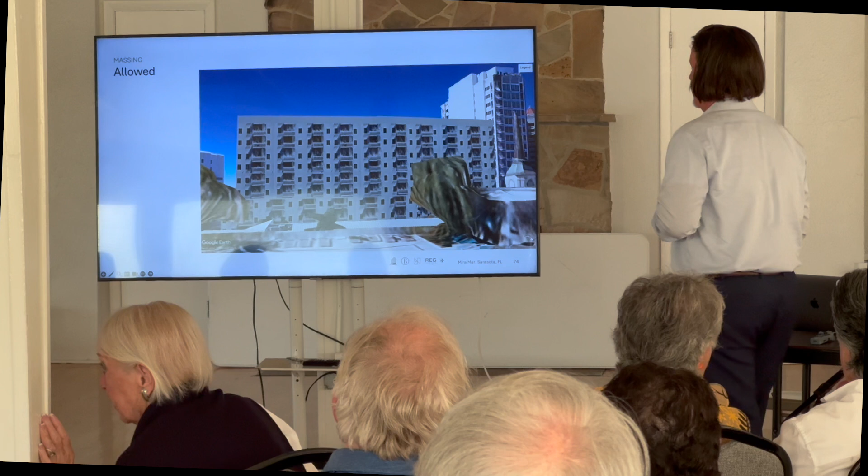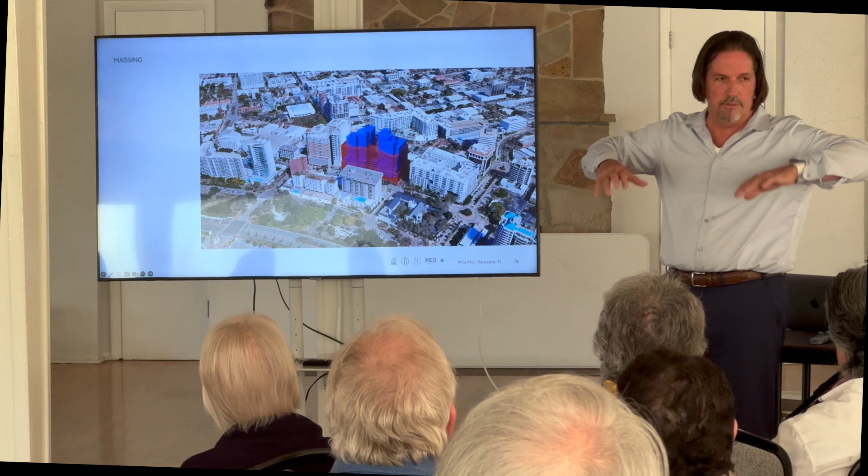All right, so the next slide, these are just more graphics for you to see. The blue would be what we're proposing, the red is what is allowed. So if you want to look at this, consider that the red is at that level, the air and light you'll be missing out on if we have to build the bigger, lower building, while the blue is what we have to build. This is from the back, from the east side, sorry.

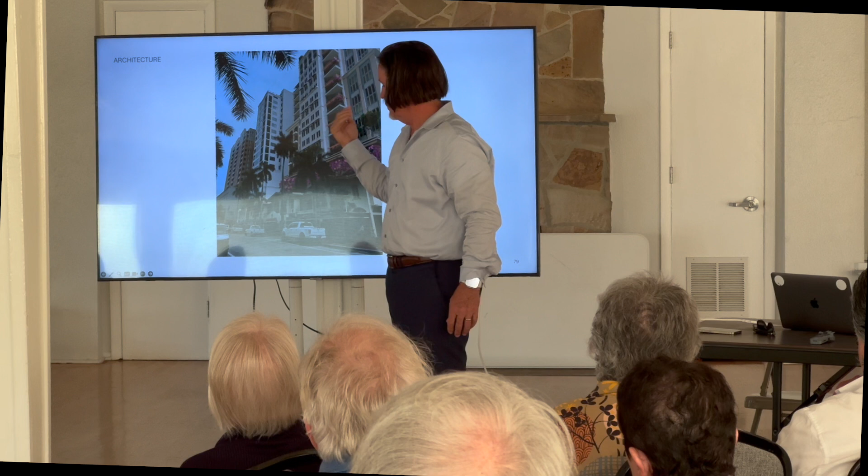So really quickly, architecture, now that we've been talking about all this massing stuff. The pedestrian experience I spoke so highly of, that the Mira Mar is known for, that I'm sure all of you like and love. Here it is, the building is there, we're blocking the DeMarcay wall. It's set back so far that we're still revealing their windows, so we're being good neighbors, so they still don't lose their rooms this way. But you can see that the street side, the street experience is pretty much the same. We're backing up so that you don't feel that problem.

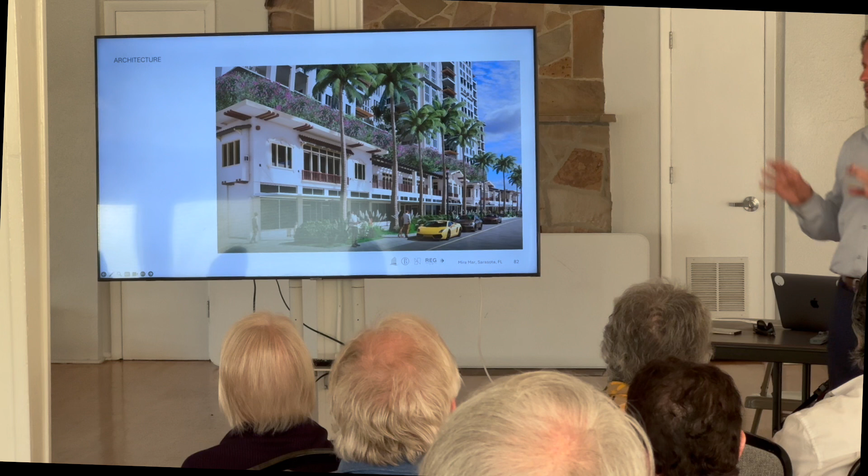So these are both models put together. You get to see Rick's historic renovation, his model with his rendering, and our building in the back. I'm very proud to say that our building looks like it's in the back, right? Make sure it feels like it's in the back. Mira Mar is in the front.

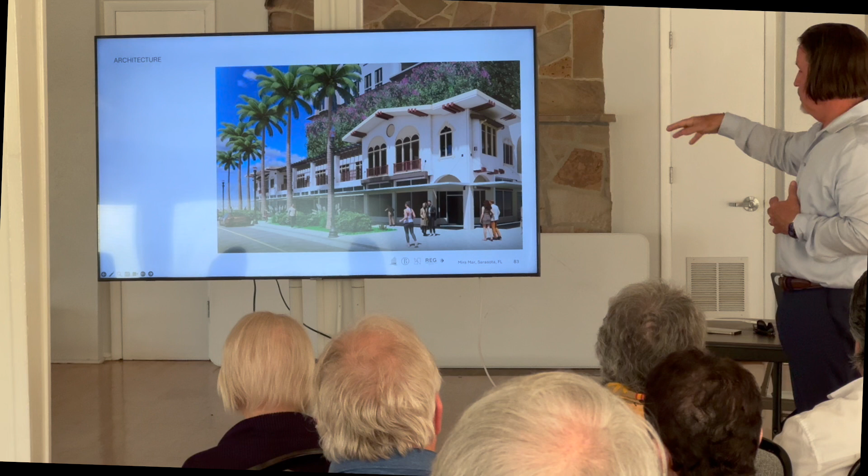The experience is still there. The pedestrian experience is still there. What Rick showed you and what we're showing you now, really the experience from the pedestrian, one of these people, is relatively identical.

Courtyard, the entrance to the courtyard. It's at the south corner, very important corner, because for a lot of people, the first time they're gonna see it. And we didn't speak about the actual vocabulary, but you can see we're repeating the triple window, we're repeating a lot of the components. They're not identical. We didn't want to copy it, but we did want to make it feel like it came from the same window.

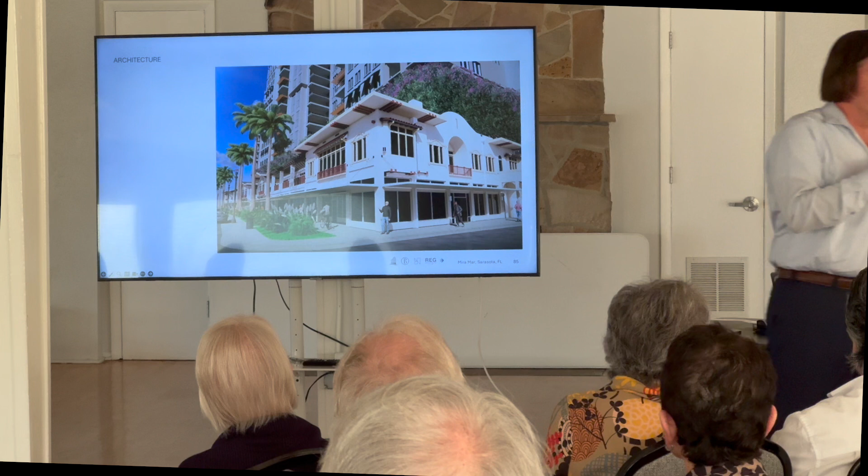Okay, and finally, this is the night shot. This is something I coincidentally came upon one day in Sarasota. I had never seen these lights, and I took a picture of it. I remembered it, and I said, you know, this would be a great rendering shot. So I flipped through my iPhone and found it, and we made a rendering of it. It's the existing condition, so this is not including Rick's work, and it sort of cuts the top of the tower, but I think it's a great image.

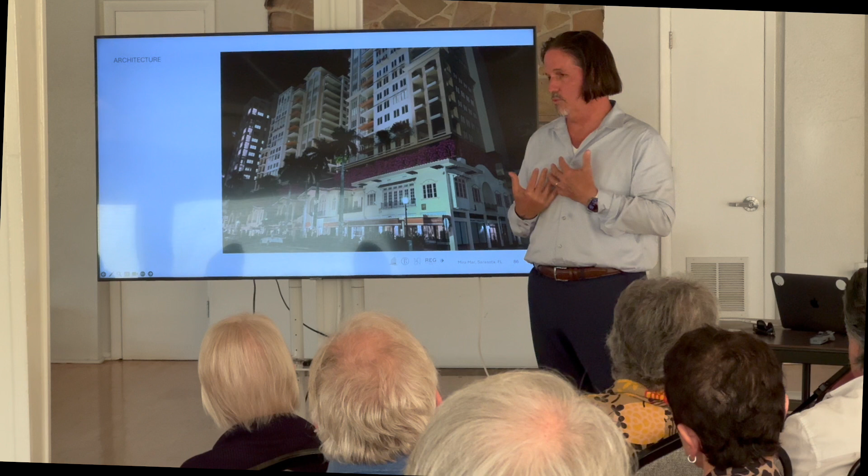As I'm looking at this image, we're really a great team. I've worked with Patrick on other projects. He does what he says he's gonna do, I can tell you that. He worries about his local people, being a local himself. Rick is an extraordinary historic architect, and I think it's just great that we got together to do this. This is a great opportunity for us as a team. It's going to be on all of our resumes, believe me. It's going to be on all our websites, and really this conversation is about hoping that you guys can jump on and be as proud as we are. If not, you can tell us, let us know, make recommendations, make comments, ask questions, and really, we want to make sure that everybody is as proud of this as we are up here.

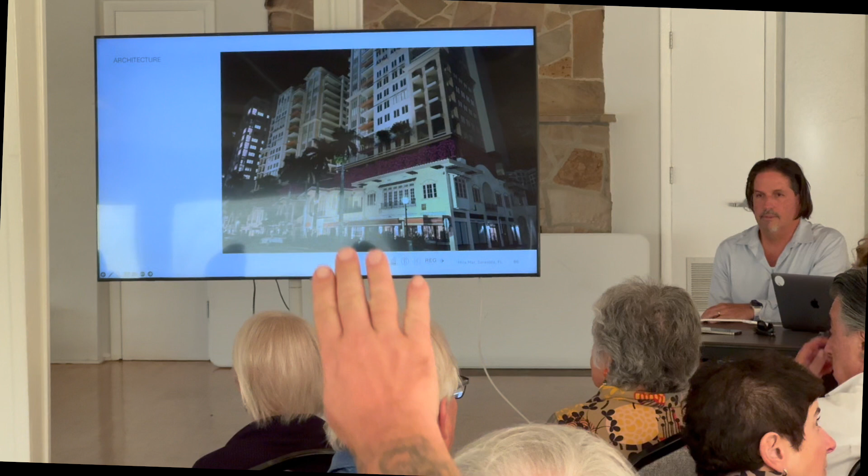All right, I'm gonna read the first one, and then I'll pass out some more. First question: two cars can't go down Miramar Court at the same time. How would you deal with that?

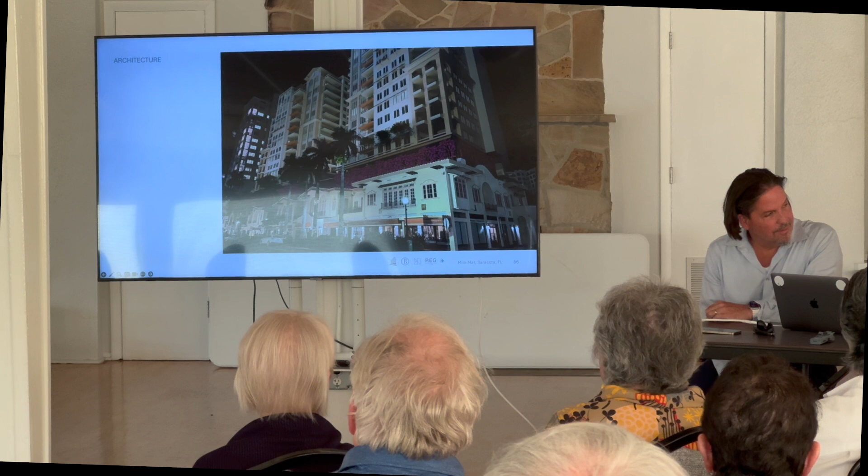I'm just taking that. Two cars cannot go down Miramar Court at the same time. How would you deal with that? Yeah, I'd be happy to take that.

We're still very early on in terms of taking a look. First of all, my name is Philip DiMaria. I'm a certified planner with Kimley Horn & Associates. We're a local engineering, planning, and landscape architecture firm. We do a good amount of work in the city, and this is something that we run up against often.

Basically, what occurs when we do a site design or we're looking at off-site improvements is we take first a look at the engineering design criteria manual. That's really a book published by the city that labels almost every street in downtown and identifies a cross-section associated with it. So for the purposes of Miramar Court, we would be required as a developer for our portion of the site to bring it up to code. If Miramar Court is found deficient in terms of its width, then we'd be required to provide additional right-of-way or additional pavement to ensure that we bring it up to code.

Now, I will say that in downtown Sarasota, sometimes a deficient or narrower right-of-way could be presented as intentional, and that's to slow traffic down. The wider we make roads, more often cars fly down them. So if there's a narrow street, sometimes that leads to traffic calming. Almost always it results in slower traffic and better pedestrian movement. Just something to consider there.

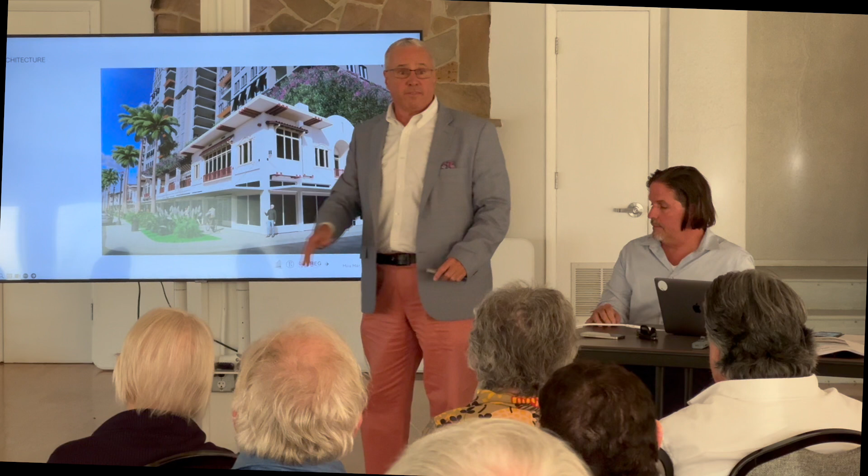Well, that's the original design, the 1920s design. The arcade or colonnade was added. It's bulky, it's tight. It doesn't really approach the right look, aesthetics, historic aesthetics for the building. In fact, many buildings today are being designed going back to that type of design, because you eliminate columns, you have more room. The sidewalks are gonna be very large. Beyond this point, we're gonna have another 20 feet to the curb, but that's what helps with the detailing, to bring back the historical.

What's the second question? Will the church... Yeah. Oh good, yeah, I can touch on that one. So...

The church—actually some of the members of the church that we've been working with for the last couple of years, or at least a year and a half, attendance, and they keep coming. I'd like to say that we've really had a lot of conversations and learned a lot from what they felt would be important in the project. And that's where we've done our best to incorporate a lot of those aspects.

So what the current plan is for the playground, and they could speak to this a little bit further, is to relocate the playground onto the church's property, on the west portion of the church's property, where there's currently some parking and drive-through there. So we worked with them on exploring some options to make sure that was feasible, both economically and location. I think at the end of the day, from our perspective and from their perspective, it will be a better opportunity for the children to remain on their campus and safer versus having to cross the street that was referenced earlier.

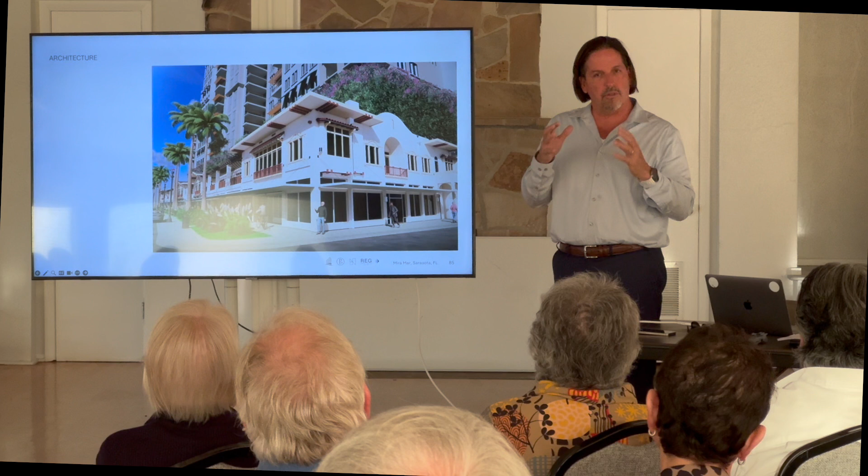We'd just be putting another one of those there. We immediately said, besides not pulling back some memories from the historic building, just to be good neighbors, we should make the building skinnier, which of course means we've got to make it taller to be able to make it work. It actually helps the air and the light - that graphic that I showed you, we did it in blue and red to make sure you can see all the red that you were looking at would be lost as far as sight, as far as air, as far as light getting past the site.

Igor, could you jump back a couple slides just to show the vantage point looking from the east towards the west? That would help assist with answering that. This is almost the perfect slide.

So, yeah, the red is what we're allowed to build right now, that's what's currently zoned. We can just go ahead and go for a permit for that. This is what we're proposing, but of course we're missing out on square footage, so we want to put it on top, we want to make the building skinnier - but it's not just because we want to go up taller, it's because we want to give air and light.

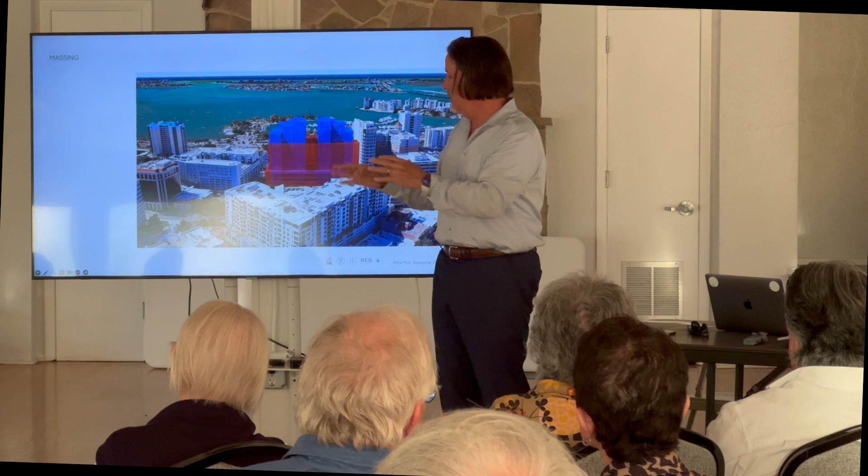There's a diagram that shows 17 feet from this building, 15 feet from the street, 50 feet in the back and 42 feet in the front. I'm gonna be bad at math right now, but that's about 80 feet that you're gaining of views through. Now, where they are exactly we can tell you more or less where they're at right now, but you're gaining more than 80 feet of view.